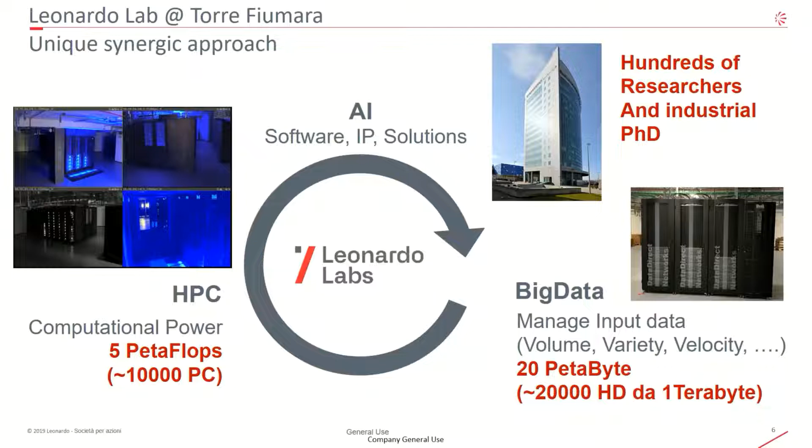So for what concerns the current speech, probably interesting for you, there is the concept we developed about the digital twin we are implementing within the company. The lab, as I said, the Da Vinci supports all the labs.

Among the labs, there are also labs looking at electrification of flight, looking at new materials, so light materials, looking at using quantum technology. We also have within our lab a quantum computing initiative, but also quantum communication and quantum technology in general.

But one of the central topics and research topic we are dealing with is the one connected with digital twin. For us, digital twin is, first of all, a multi-component, multi-scale system, a digital system that should support the virtual design and lifetime management.

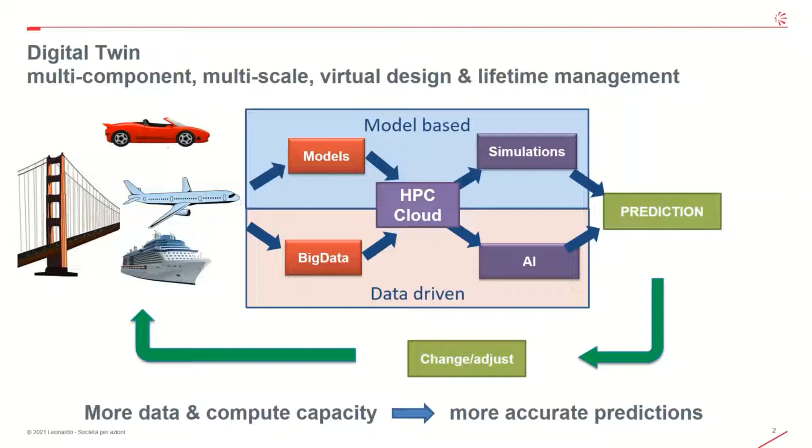For us, more data and compute capacity means more accurate prediction. This is the end game of this loop, no? And this motivates the fact that we invest in HPC resources and cloud-like resources. When I say cloud, I'm not referring to a public cloud, but an internal cloud. I will show you shortly.

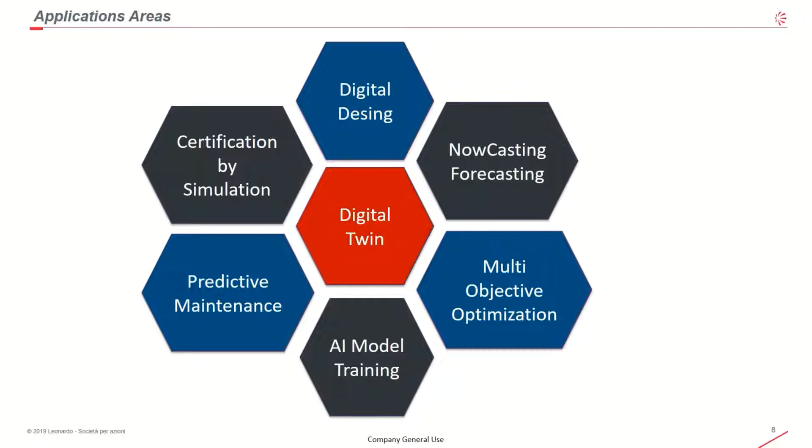Around the digital twin, there are many other ancillary topics or goals, like digital design, multi-objective optimization, predictive maintenance as I said, but also important for reducing the cost of designing a helicopter or aircraft, like certification by simulation. So to be accurate such that we can perform part of the certification process of one of our products just by performing simulation, and not actually building a real test bed to crash it or to certify it through a test campaign.

So as I said, the two paradigms, the model-driven and the data-driven, are supported by two different software stacks. From the model-based kind of digital twin or simulation, we use a traditional HPC software stack, down to the software paradigm for accelerators, compilers, debuggers, MPIs, batch scheduler, parallel file system, and all what you find in any other HPC system around the world.

But for the data-driven digital twin, we need a different ecosystem, also because the skills of the people working in this kind of environment are different. We need to build a standard software stack for this kind of application, one that is naturally being deployed and evolved on cloud-like infrastructure and tools that in most cases come from the Apache ecosystem plus Python. So it's a different kind of ecosystem, and people naturally use the browser as an interface to their developing environment rather than SSH or a terminal.

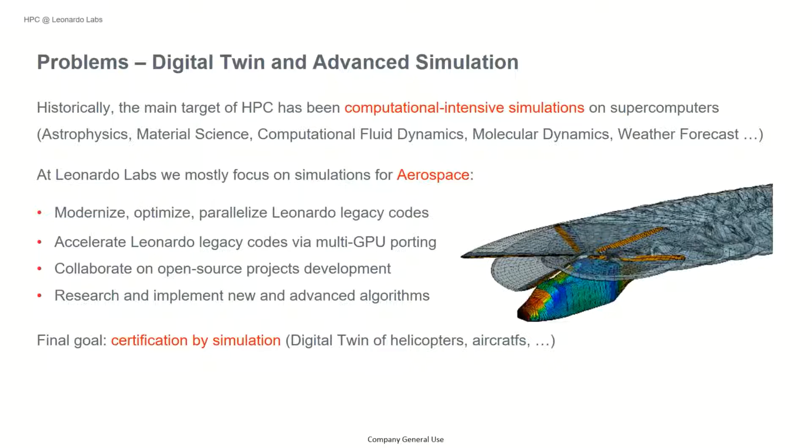So these are a few topics we are investigating. We are also looking for new numerical technology like lattice Boltzmann or multi-grid techniques, in order to overcome the problems we are encountering today using a third-party or legacy software stack.

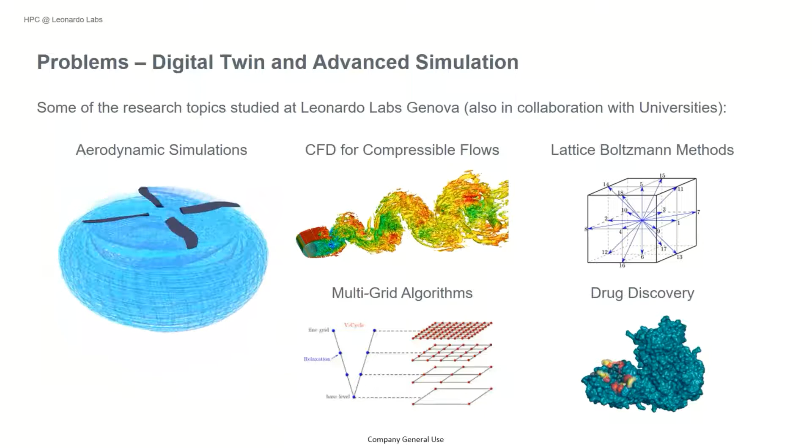Consider also that an important goal for our engineers is the time to solution, so they cannot wait months to get the result. Ideally, they would like to get a computation complete within one day. This is the target they are seeking, because they would like to keep the iteration cycle short between the computational engineers and the engineers dealing with the real design—the structural and system engineers.

They would like to keep this loop quite short and be able to shorten the design cycle of the platform. So our tool chain to X-scale, so exa or whatever scale above petascale—as I said, our machine now is only 5 petaflops, but for us it's already challenging to scale to the whole machine, also because for this kind of problem, many third-party codes do not scale, in particular for our use cases.

Our tool chain we are validating and testing right now is to use a CAD tool, which in the end is used by the system engineers, which is basically CATIA across the whole company. The idea is to go from CATIA to another tool, in this case Pointwise, to fix the problem with the grids and make the computational grid itself open, meaning we can play with it as we would like, in terms of porting the model to different tools and open source tools.

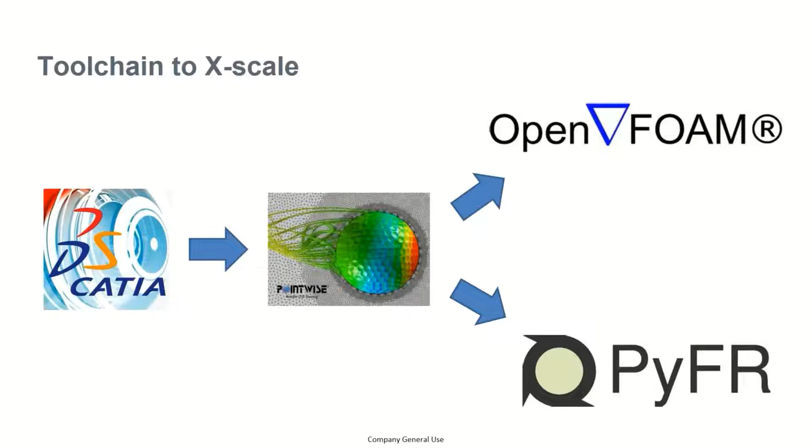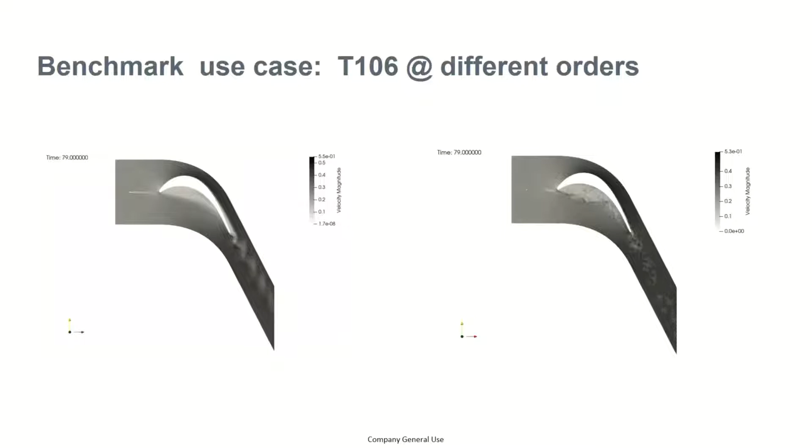So we are benchmarking some tests from the literature, like this one. As you can see, we are performing different tests at different scales of accuracy to see what are the advantages of using higher order kinds of simulation.

We are spending a lot of time fixing the grids, because this has an important impact on the convergence property of the simulation. So if in the grid there are holes or submicrometric refinements, these are not going to work well with convergence time, and we would like to be as quick as possible.

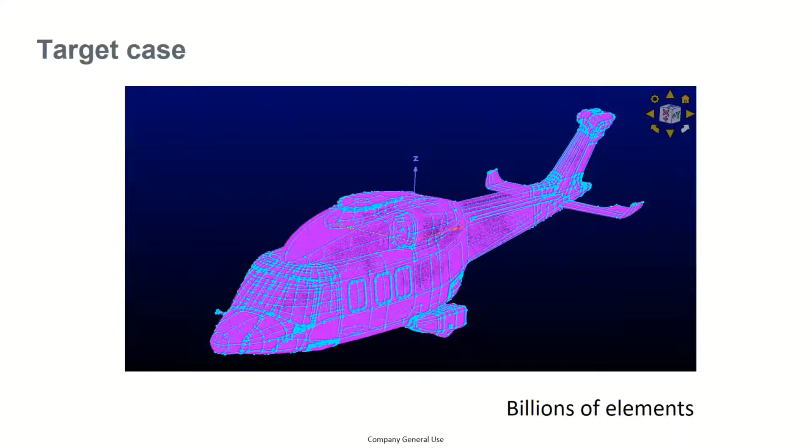128 of our GPUs are A100, the latest NVIDIA GPUs. So 128 GPUs correspond to roughly 1.5 petaflops of peak power. So we are already able to scale up to about 1 petaflop.

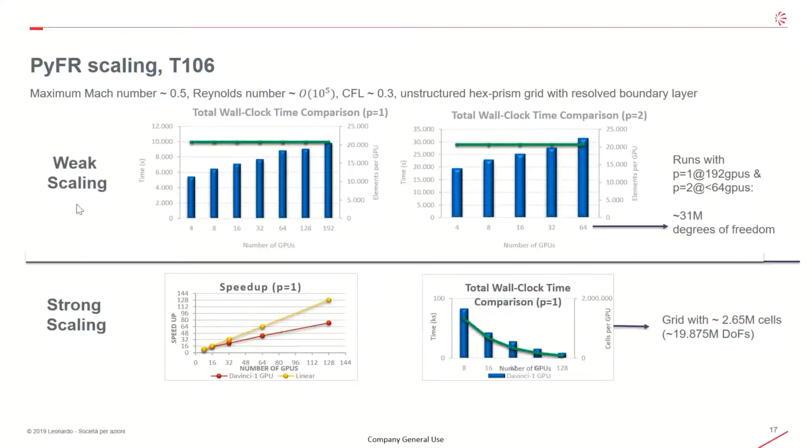So this will be the path for how we can reach, even in reasonable time, the need for exascale infrastructure. I think that's almost everything.

Just two last slides. The researchers of the labs are going to present more results in detail at the following conference, which you can see in these slides. And last but not least, these are the researchers who are the engine, the brain power behind all this I have shown today. And that's it.

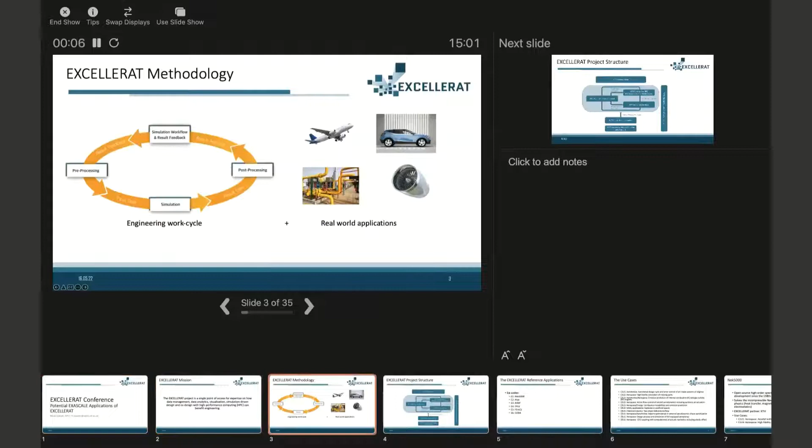Thank you very much, Andreas. Can you see my screen? We see the speaker's view. Now it's fine, perfect, now you see it. Okay, I've also gone. So it's wonderful when technology works. Hopefully you see my title slide. Thank you for the introduction, Andreas, while I've just got myself set up to present.

Yes, as Andreas says, I'm Mark Sawyer from EPCC, which is the HPC Centre at the University of Edinburgh. It was my role within the EXCELLERAT project to manage one of the work packages that was looking at a set of reference codes and use cases around which the whole work of the project was built. So my talk is going to cover, at a fairly high level, the work we did with those use cases, some of the results, and what the outlook could be for the future. The reasons for treating it at a high level are twofold: first, there isn't really time to do justice to the amount of technical work that's gone into the project, and secondly, I'm not really a technical expert on any of the application code. So for that reason, it's going to remain at a high level.

If you are interested in more detail, there's a great wealth of publications, papers, presentations, success stories, and so on that have been produced by the partners. We are in the stages of producing a final deliverable, which will be public, and that will be a good summary of all the results and all the work that we've done.

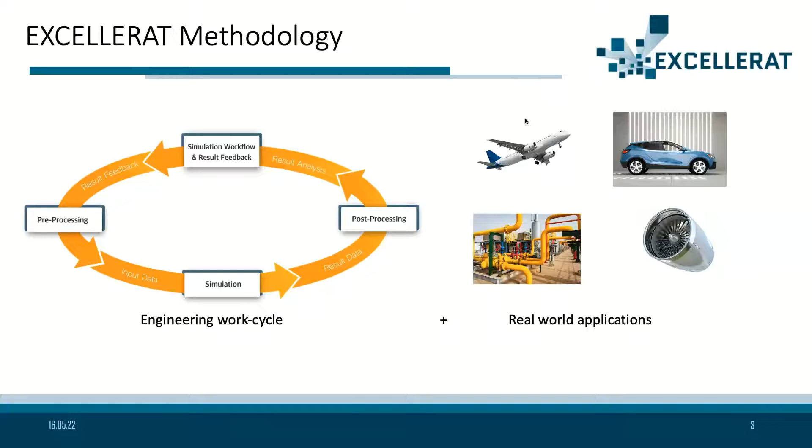One is the application development, and that's the one I'm primarily talking about. But in fact, we had other work packages that were focusing on particular methodologies and technologies. So that's work package 3.

So this is things like improving individual node performance, looking at system performance, other technologies like visualization, data handling, mesh generation. And then the other work package in there, work package 4, was looking at how these could possibly

be servitized in a way that would make the center sustainable through offering these to external parties through a service portal. And there's a lot of progress made in that area towards the center becoming, one, sustainable, and two, being able to offer its services to a much wider community.

Okay, so to just list the codes that we have. So we have 6 codes. We've got NEK5000, ALYA, AVBP, TPLS, FEniCS, and CODA. And I'll be going through each of these to say a little bit about what they are and something about the use cases and the results that we got from the project.

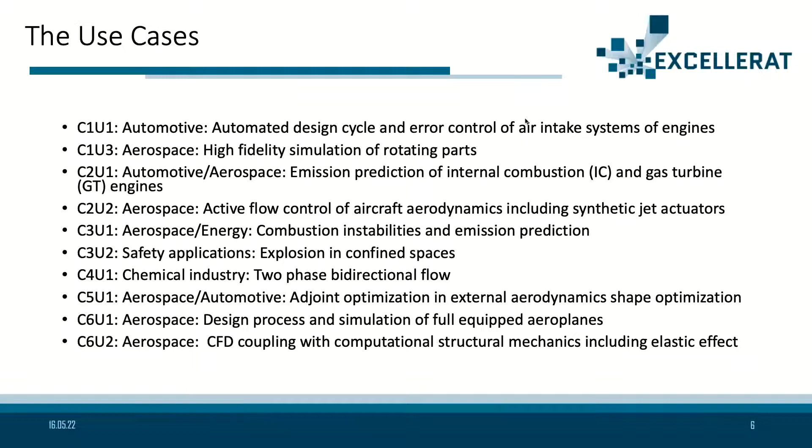Okay, so I'm now going to go through each of the reference applications and say something about the use cases associated with them. So I've got maybe 3 or 4 slides associated with each one.

So the first code I'm going to talk about is called NEK5000. So this is, as it says on the slide, an open source, high order spectral element method CFD code. It's been under development for quite a number of years, so there's a lot of legacy development that has gone into this code. What it does, it solves Navier-Stokes, incompressible Navier-Stokes.

It does a lot of other types of physics as well, so there's heat transfer, electrostatics, and a number of other things that I've listed on the slide. The EXCELLERAT partner that was involved in this code was our colleagues from KTH in Sweden, and they had two use cases associated with this code, both from aerospace. One was flow around an aerofoil, a static aerofoil, and the other was a simulation of rotating parts.

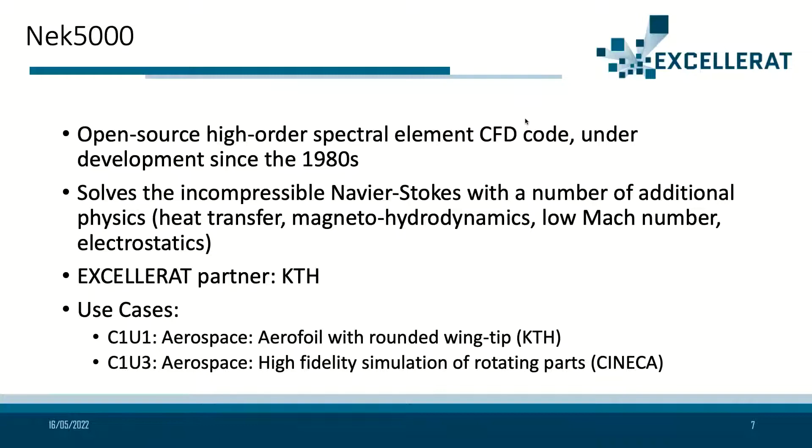So here's some, as always with CFD, you get some nice colored images. So this is one that shows the aerofoil with the rounded wingtip, and the flow from the simplified rotor.

If we look at why these are important simulations, the researchers are interested in the results of these as well as the optimizations that we make and the improvements to the performance of the code. The actual results of these test cases is useful.

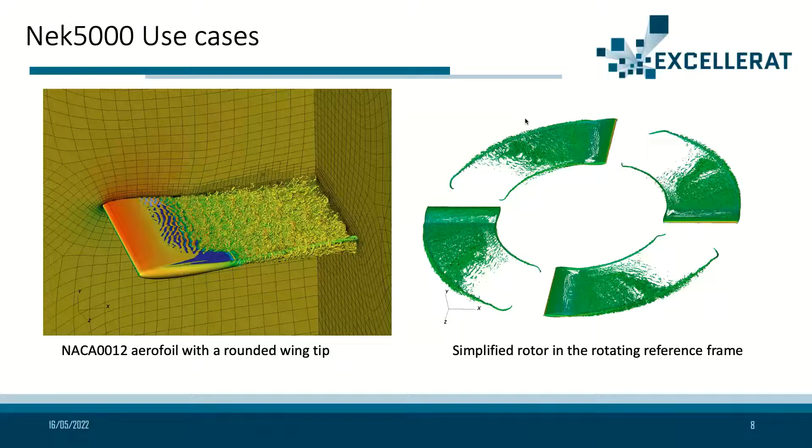In the case of the aerofoil, obviously, the lift and drag affect the performance of the aircraft, but it's not just simply the performance of the aircraft itself. There are safety margins that are required due to turbulence that is downstream from the aircraft as they take off and land. And so if that can be controlled, if that can be improved, then it means the industry itself can operate more efficiently. So there are benefits beyond simply the individual design case here.

Okay, so to talk about some of the things that were achieved by KTH and their colleagues. One of the big things in these use cases was incorporating adaptive mesh refinement, and that allowed some previously unaffordable simulations to take place. Effectively, the idea is to make the mesh much finer around the regions of interest, and to do this during the runtime of the simulation in response to the way the physics is developing.

We heard earlier today about the UQit uncertainty quantification toolkit, so I won't say much more about that. The simulations were tested at full scale on the Dardel and Lumi supercomputers - Lumi being the pre-Exascale machine - and both showed good, strong scaling.

There's optimism that we have codes that can scale up to Exascale when those machines are in place. The integration of the visualization tools was something covered by Dennis in the earlier presentation. The researchers were able to gain real results on the turbulence stats and other things they needed to understand from the simulations.

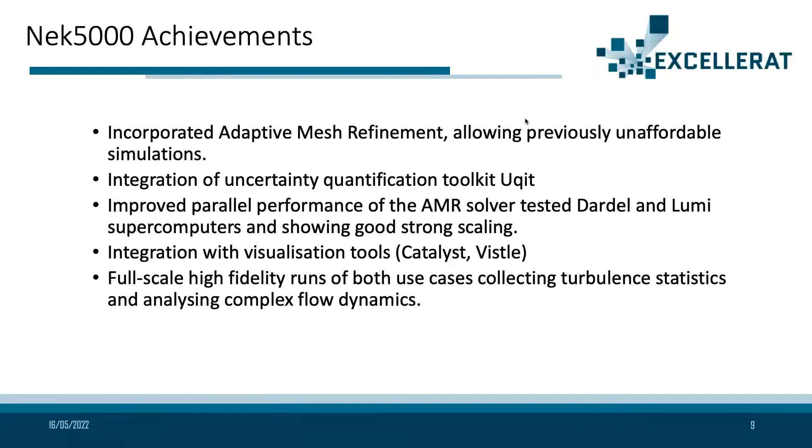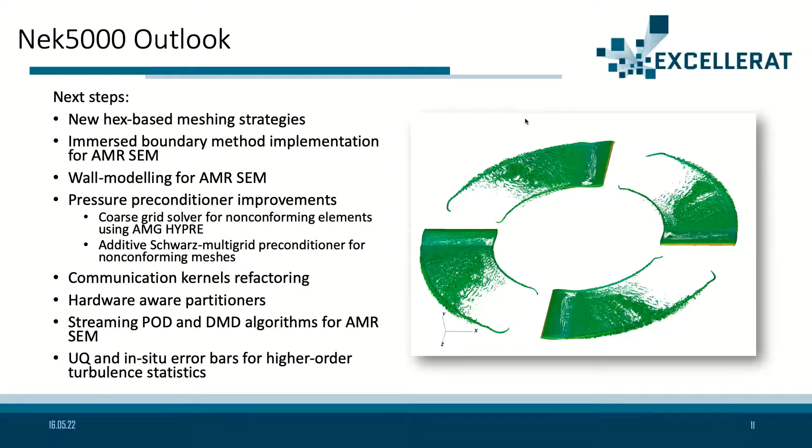Looking at what the team is looking at next, we can break it down into several areas. There's some to do with numerical improvements, things like preconditioners and multi-grid. There's the actual implementation of some of the communication and computation kernels, and advancements to the meshing strategies to capture geometries better. And then there's data reduction techniques so that post-processing becomes more efficient. You can see how these things will affect different parts of the cycle, the yellow cycle I showed earlier on. I'll move on to the next code.

This code is called Alya. It's a multi-physics HPC code using the finite element method - very large scale, complex geometries. Unlike Nek5000, this isn't open source. It's distributed according to a license use agreement, and the EXCELLERAT partner was our colleagues from Barcelona Supercomputing Center.

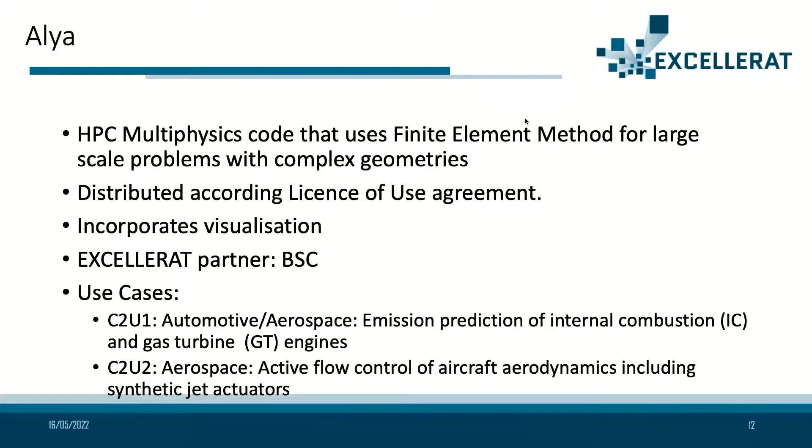Again, we had two use cases associated with this code. The first was emission prediction from simulating the combustion inside a gas turbine engine, and the second was flow over an aircraft wing to analyze the synthetic jet actuators. Here are some nice pictures showing this sort of use case that the team was looking at.

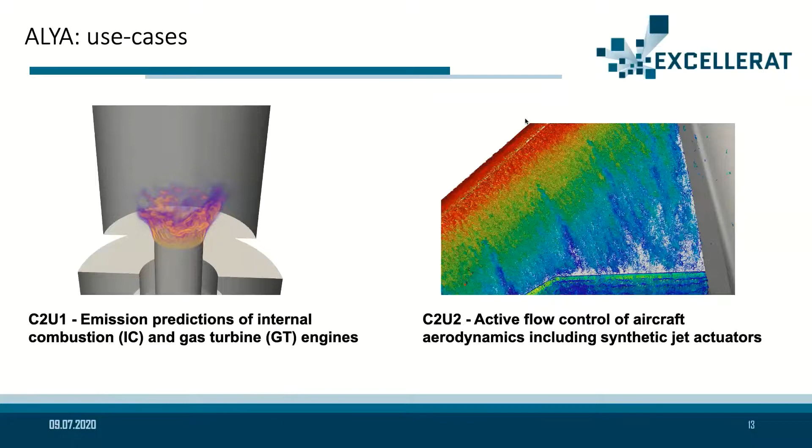The people at Barcelona did a huge amount of work on developing the fully parallel workflow. This is trying to ensure that every part of that engineering work cycle is benefiting from parallel computing, so that the bottlenecks you would get by not improving the whole cycle are removed.

There was a lot of work done in this project on load balancing, both at node and system level. As you could imagine with something like a combustion simulation, there's a lot of work concentrated in certain parts of the domain, and being able to redistribute the work at runtime gives much better scaling. So developing and incorporating the adaptive load balancing was a big part of the project.

As with some of the other codes, as you'll hear later, porting to GPU and other emerging technologies such as FPGAs was quite a big part of this project. We all know that the next generation of computing, exascale computing, is going to incorporate technologies like GPUs and other accelerators, and having codes ready to take advantage of those is an important step. Once again, this let the project enable real analysis of some of the results from these two use cases - the researchers were actually interested in what was being simulated, and got some useful outputs.

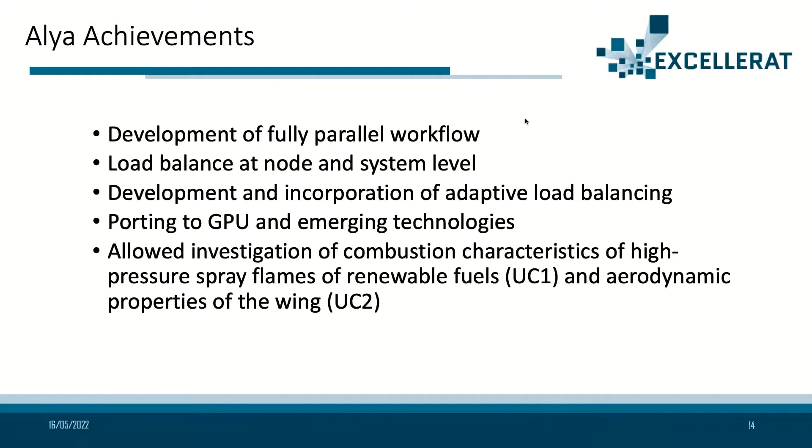Basically, what the Alya team are looking at is to improve the load balancing and take that all the way up to system level, and continue the work on the accelerators and GPUs.

AVBP is the third code I'm going to talk about. This is a finite element, finite volume, 3D compressible flow solver. The EXCELLERAT partner for this is CERFACS in France. It does a lot of the general CFD things, large eddy simulation that can use unstructured grids. Once again, this is a licensed code, not open source, so it's distributed case by case basis for open science.

The use cases here: one was a safety application, an explosion in a confined space, using a standard model geometry, which is important for comparison of results. And in the aerospace and potentially the energy sphere, looking at combustion instabilities and emission predictions, so that an aircraft engine, for example, can meet emission requirements.

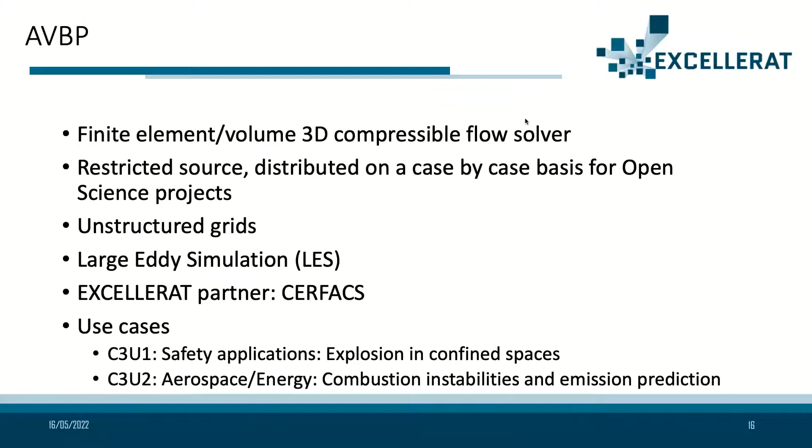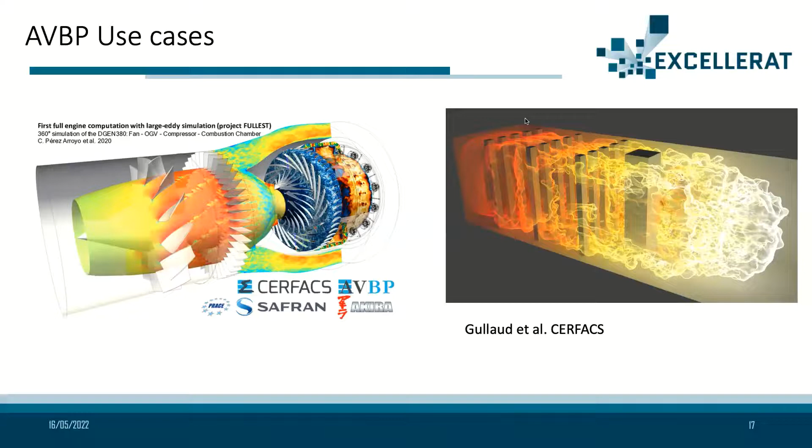So if we look at this, on the right-hand side is the explosion in the confined space example, and on the left we see the aircraft engine.

So what do we do? What was the work that was done in AVBP?

Once again, there was a lot of work done on adaptive mesh refinement and adapting the code for GPUs. One thing the project achieved was cross collaboration with the EPEC project, which produced an adaptive mesh refinement tool called TreeAdapt, incorporated into AVBP. This greatly improved the efficiency of the computation, a factor of 2 speed up compared to just having the static mesh. So that's a big step forward.

And there was a very successful port to a GPU version, which was then run on the tier 1 Jean Zay system. So a lot of progress there towards Exascale.

The next things AVBP will be looking at are Lagrangian simulations, more automation of the workflow, looking more at hardware acceleration and new technologies, and just further code maintenance.

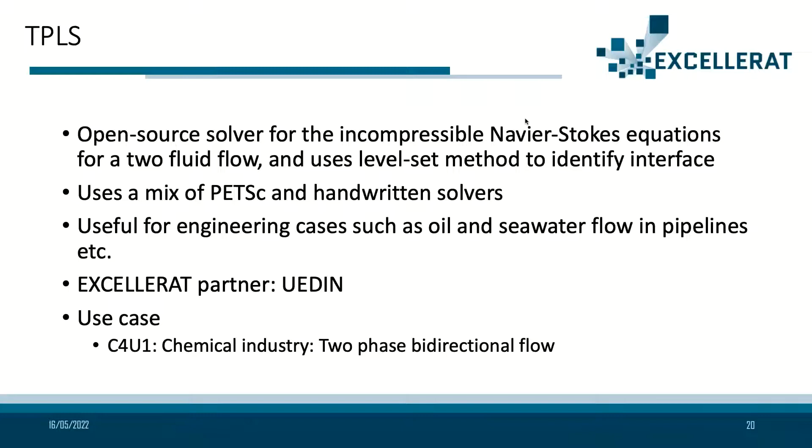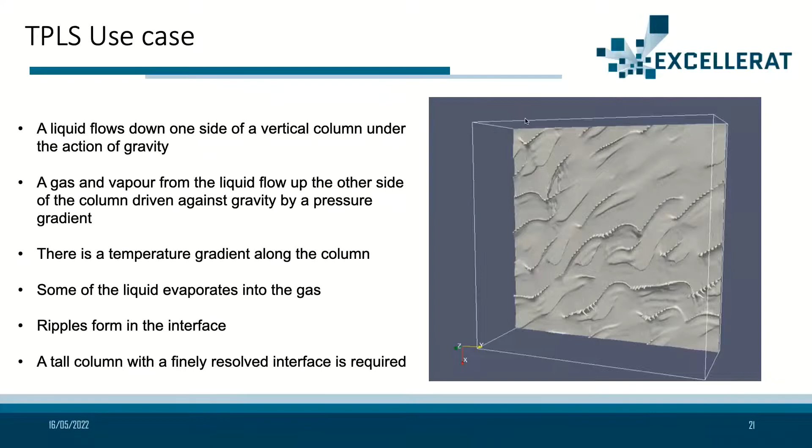So what do we get out of the project from TPLS? One of the things we did was look at the GPU performance, and we were quite surprised that this didn't perform very well on GPUs. What we discovered was that the PETSc libraries were not very well optimized for the GPUs we were using. There was some issue with the performance.

So what we did was develop a native GPU version that we now have available to release into the main code. We also did some work on I/O scalability, removing some bottlenecks and requirements for nodes needing very large amounts of memory to run the simulations. So that has increased the ability of the code to scale.

We added some new phenomena to this: a new method for identifying the interface between the fluids was developed, to enable other physical phenomena to be modeled. We've also added temperature and introduced the proportion of vapor in the gas phase as degrees of freedom. So quite a lot of extra physics going on in TPLS as a result of EXCELLERAT.

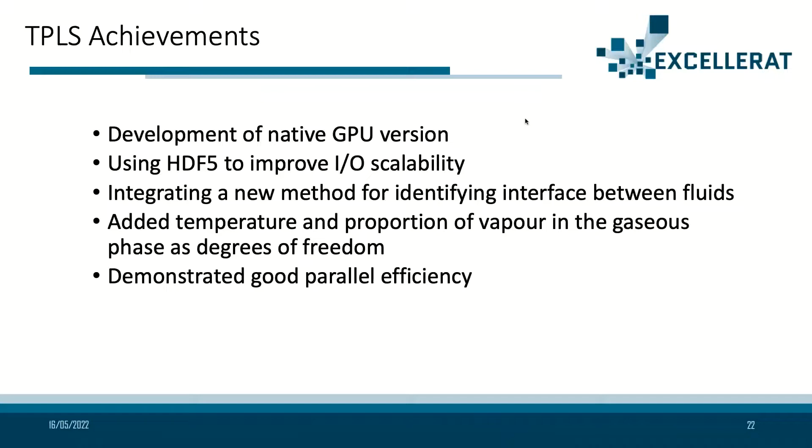I'll move on to what the outlook would be. As we reach the point where strong scaling ceases and we start to be more weak scaling, we have an opportunity to introduce more physics into this to increase the load and exploit the weak scaling. So that's probably the way things will go forward.

We still have the GPU enabled code ready to use when we have access to such a machine, but we understand that the PETSc code has had a lot of work done on the GPUs, and consequently that may in fact be the best way to use the code on GPUs rather than the native version. But we still have that available, and of course that means the code is more portable.

FEniCS is a little different from the other codes as well. It's more of a problem-solving environment which generates code from a more mathematical description of the project, rather than a programmer directly coding things. So in that sense, it's more of a problem-solving framework.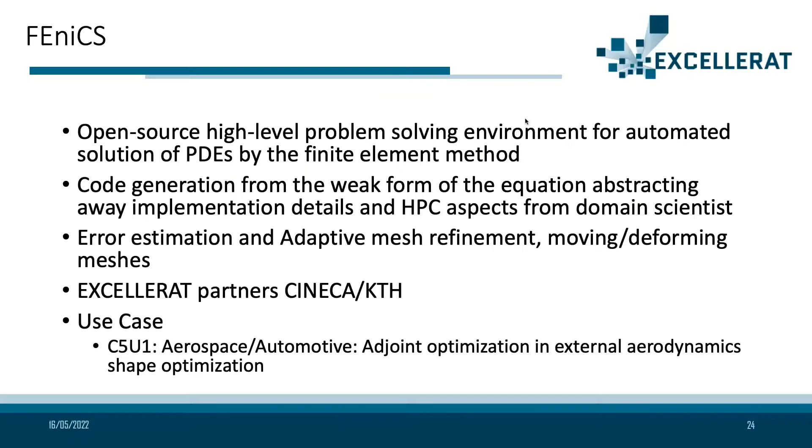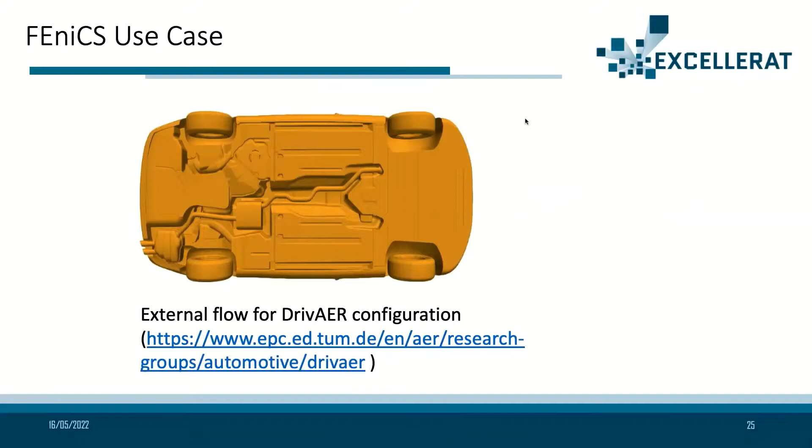The work that we did mostly in EXCELLERAT was to do with adaptive mesh refinement and looking at some of the components that plug into the framework. The EXCELLERAT user partners here were CINECA and KTH, and the use case was adjoint optimization of a car shape, which I've got a picture of here. This is a standard model used for benchmarking this kind of code, so it's useful for comparison with other work.

So what we did under FEniCS was some advancements in mesh generation, mainly around mesh generation refinement, and we tested it using a standard geometry. There was a particular problem to solve regarding contact between the wheels and the ground within the mesh, to make sure it was numerically stable. So there was some work done to overcome that problem.

If we look at the outlook for FEniCS, I don't think FEniCS is going to be taken forward in a continuation of the EXCELLERAT Centre of Excellence. I think it was judged from the work we'd done that it wasn't quite mature enough for GPUs, and there was perhaps a little bit of a lack of expertise within the project to take that forward. But FEniCS itself has been undergoing a transition into FEniCSx, and this was happening during the timescale of the project, so it may well emerge as a very powerful framework for exascale computing.

And finally, the sixth code is called CODA. This is a relatively recently started initiative, a partnership between research and industry. It's been designed with specific requirements for exascale, so they're looking at multi-level parallelization and these kinds of technology. Unlike many of the other codes, it's much newer.

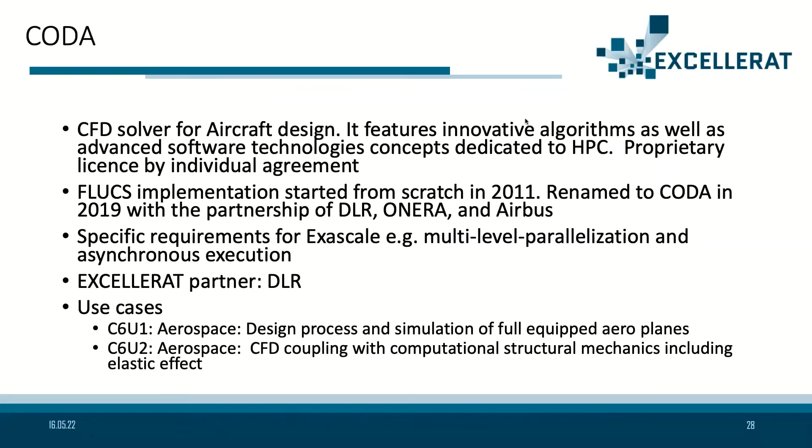So if we look at the use cases, the common research model - this has got the test mesh that's being talked about here, where we say it's very strong scale, used to test the strong scaling. Production meshes, I understand, will be much bigger than that - up to 20 times bigger. So the scale of this is really quite challenging.

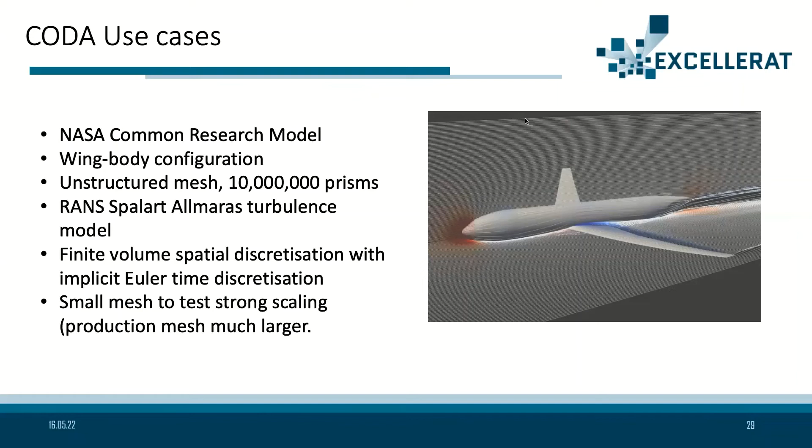So the work done in the project was to integrate a sparse linear system solver from DLR, which was done and then further optimized. There was testing on numerical stability, testing successfully on GPUs, and nice parallel efficiency with an evaluation on the Juwels Booster system.

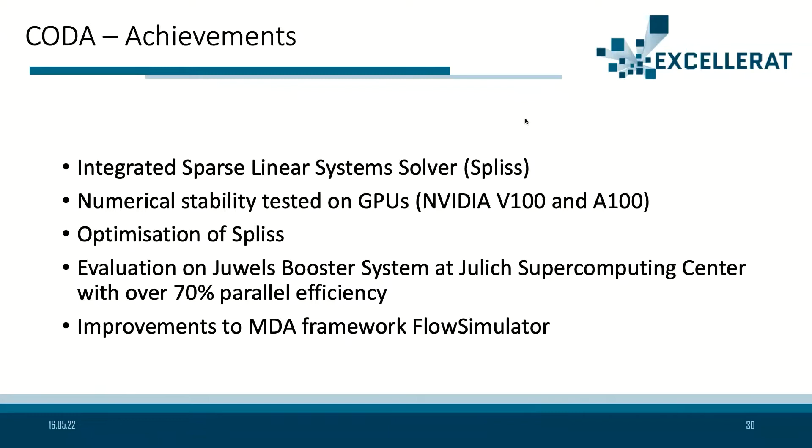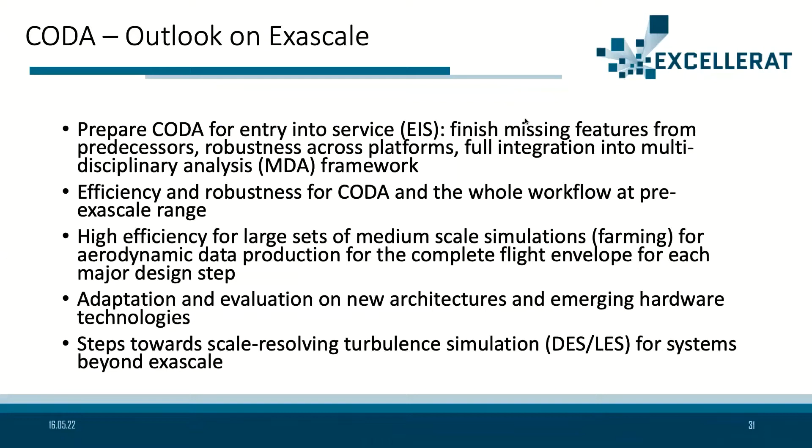Outlook for exascale: the aim is to get exascale, full entry into service of the code, adapt for new technologies - basically aiming at very, very large simulations with this code.